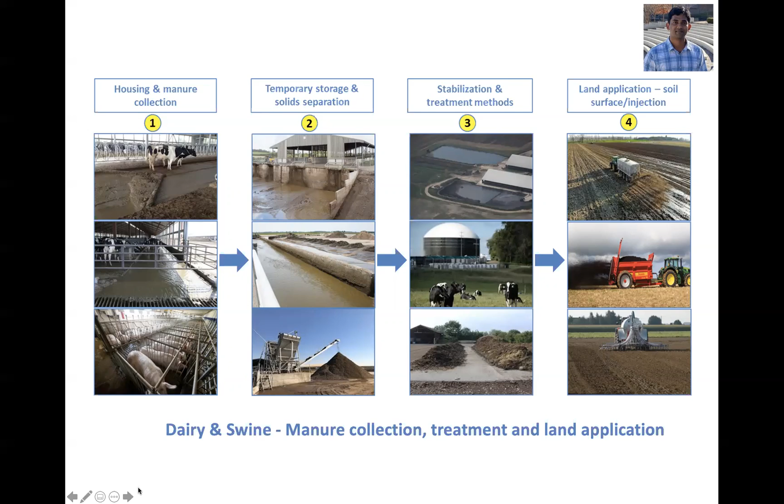So in our decision support tool, we will recommend manure management alternatives through decisions made based on three primary criteria, that is economics, environmental impact, and technology performance. Further, each of the criteria will have sub-criteria that are calculated or ranked with respect to many treatment alternatives that the user is allowed to select. For example, the different treatment technologies include lagoon-based systems, anaerobic digestion, solid liquid separation, membrane technologies, composting, etc.

Further, the sub-criteria for economics will include capital cost, operating cost, cost savings, and revenue generation for each of the treatment methods selected. Similarly, environmental impact will include global warming potential, acidification, eutrophication, and ecotoxicity. Finally, the technology performance will be ranked based on the survey question or scoring methods, which will be discussed in later slides.

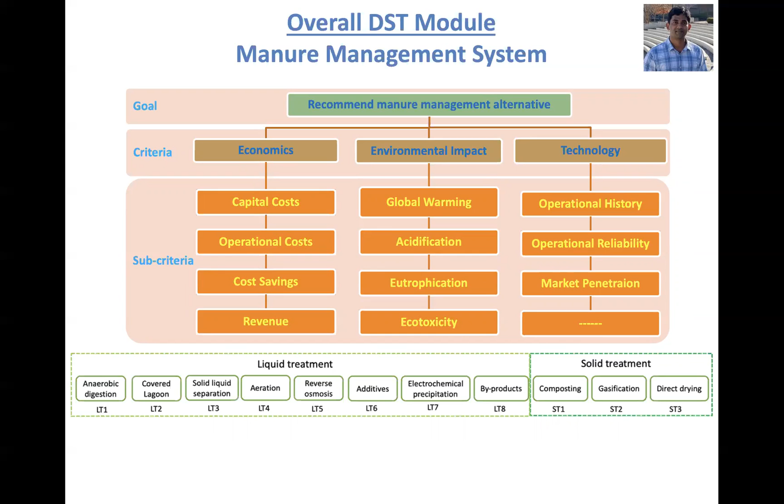The decision support tool has four major components. First is the user input sheet, where all the waste generation and treatment processes will be occurring. Next is the cost benefit analysis and life cycle assessment. Then the analytical hierarchy process for decision making, and the Python programming to read and perform calculations. The current prototype manure management tool is an Excel-based platform with empirical performance-based mass balances for several manure management alternatives representing current and emerging technologies and practices.

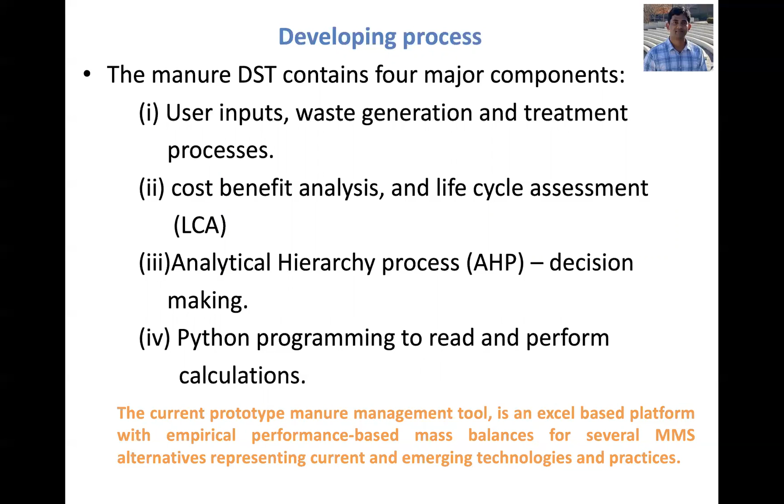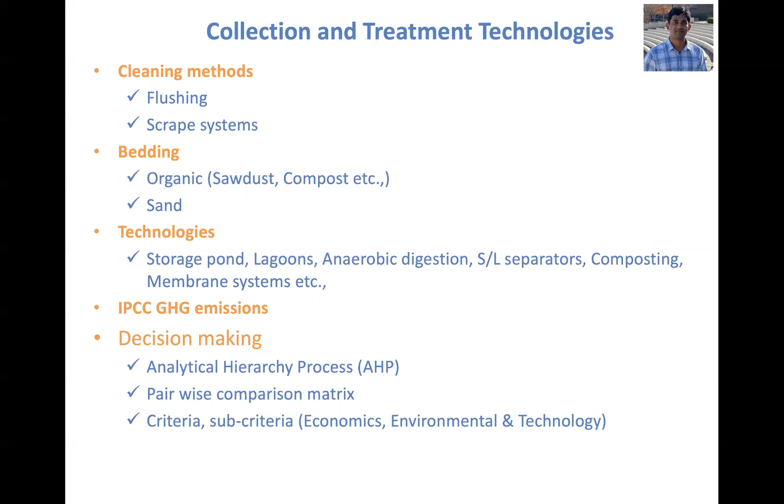The tool contains different subcomponents related to the collection and treatment methods, and the user will be provided with placeholders with a reference guide to choose the recommended values, or they can input their own farm values. These components include different cleaning methods such as flushing or scrape systems and the amount of water used for cleaning, and different bedding methods, organic bedding including sawdust, compost, or inorganic bedding such as sand, and the amount of bedding used per animal. And the different technologies include storage ponds, lagoons, anaerobic digestion, etc. And also we have IPCC greenhouse gas emissions, and finally the decision-making process.

To give an example, we have the process flow diagrams, which include different collection and treatment methods. And we have performed the pre-calculated mass and energy balance for each of these scenarios based on the number of animals and the manure generated. This is one of the scenarios where the user has a flushing system with sand bedding followed by a sand separation lane and treatment through an anaerobic lagoon system. We also included recycled flush water to clean the freestall barn and the recycled sand bedding to the cows, where all the components are included in our calculations.

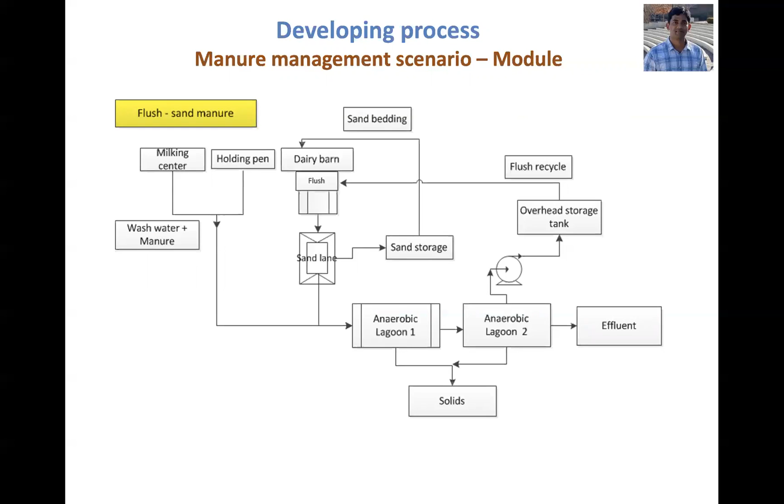So these are a few more examples for a simple storage pond with flush system, and other is the anaerobic digestion scenario, which treats the scrape manure with organic bedding followed by solid liquid separator.

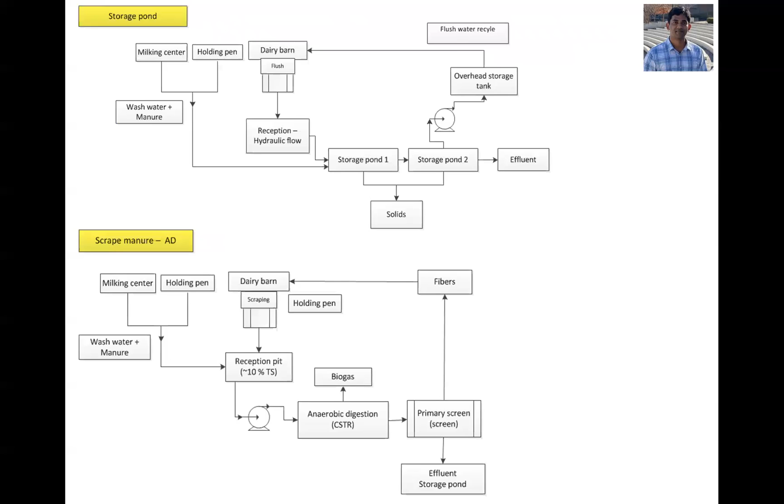Going forward, this is the user input sheet in which the purple cells have the recommended optimum values of minimum to maximum range, while the first three options are used for animal type and the weight selection by the user, and the adjacent red colored column cells are used for the user input. Similarly, we have the same option for different variables like bedding, flushing volume, manure characteristics from milk barn center, etc.

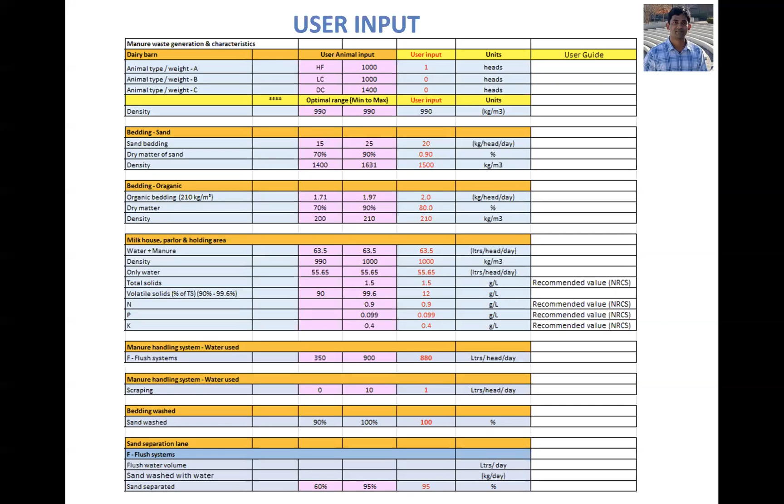Once a user creates an input file like this, they can run the program and tell it to read their file. Then the program reads those inputs and checks validity and starts performing calculations based on the scenarios that we have defined. This would also include cost analysis and LCA. Then finally, the results are output to an Excel file.

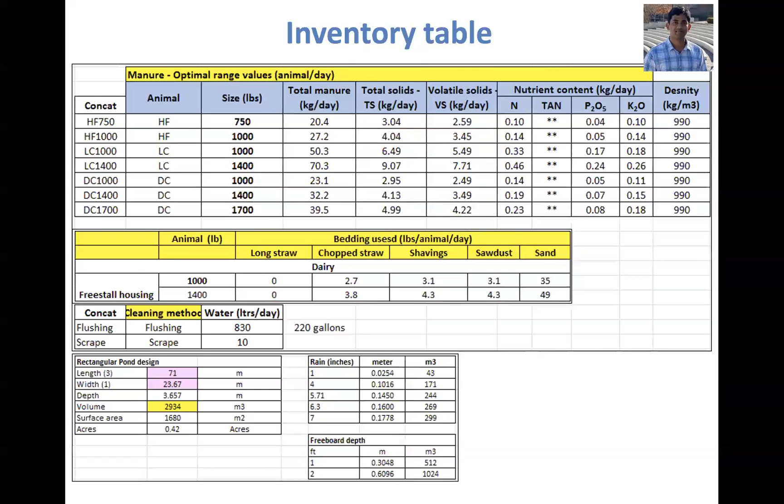This tool also provides a reference guide with the recommended values for different components of the manure management system where the user can look up values. And the treatment and mass balance calculations would include the following. For example, the total waste generated from the farm. We have the manure characteristics of all the manure generated like total solids, volatile solids, nitrogen, phosphorus, and potassium.

And the treatment calculations are performed considering the loading rate, treatment volume, treatment or separation efficiency representing different treatment methods. And we have the final effluent and solid properties. Also, it includes IPCC Tier 2 greenhouse gas emission equations for all the treatment scenarios to understand the environmental impact.

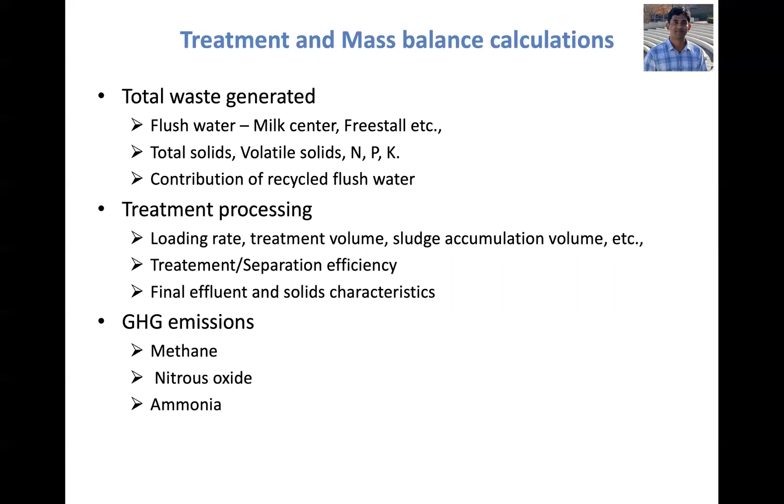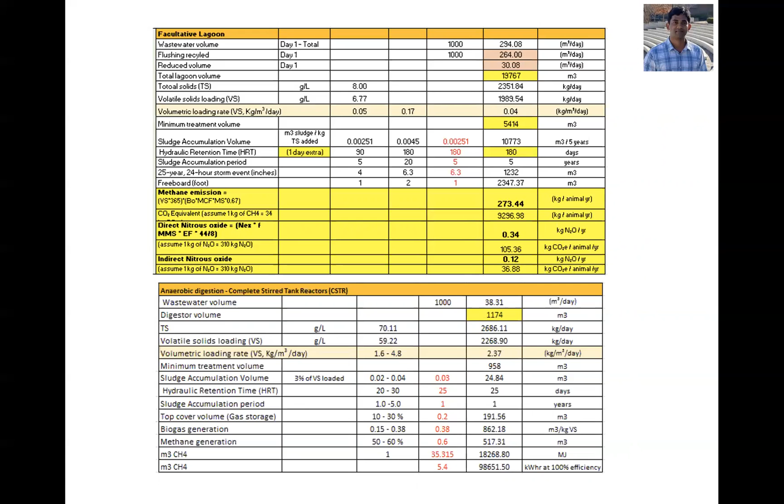This is an example for a lagoon system calculated for 180 days, which includes daily organic loading, sludge accumulation volume, storage volume for a 25-year, 24-hour storm event and freeboard, and the gas emissions. Similarly, below we can see the scenario for anaerobic digestion. We have all the engineering design factors.

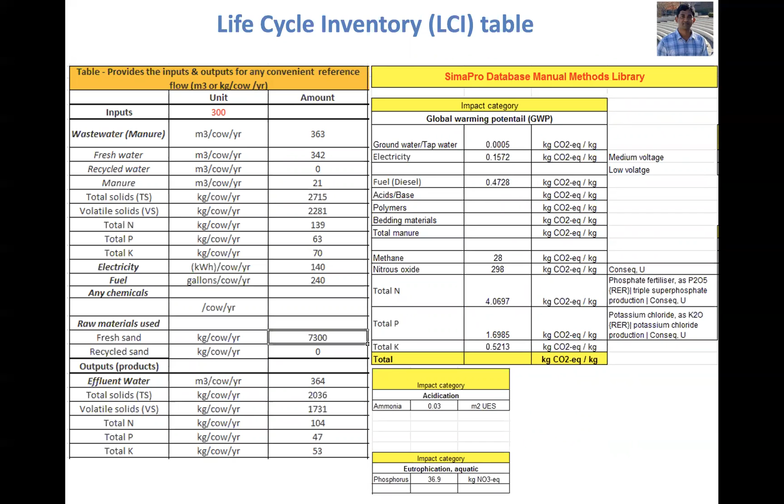And once we have the output from the earlier slide, that is the treatment technology file, we use those values to calculate the environmental impact using the reference values from the LCA software SimaPro. And finally, we use all the values from the technology file, environmental impact and economic values to consider the decision making. Please listen to the presentation from one of our team members, Erin Scott, where we have the cost and benefit calculations linked with this decision tool.

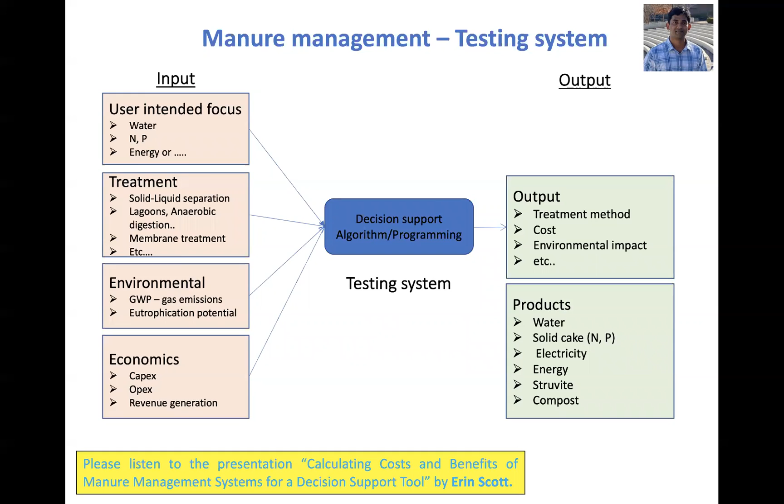For scoring the treatment technology performance, we'll be following the scoring method offered by Newtrient or by some survey questions in future. And finally, once we have all the output values, we use analytical hierarchy process to assign priorities on each alternative by identifying the goals or the importance of attributes hierarchically. This hierarchy structure is composed from low to high levels on the basis of criteria and sub-criteria, and gradually leads to the decision of best manure management alternative.

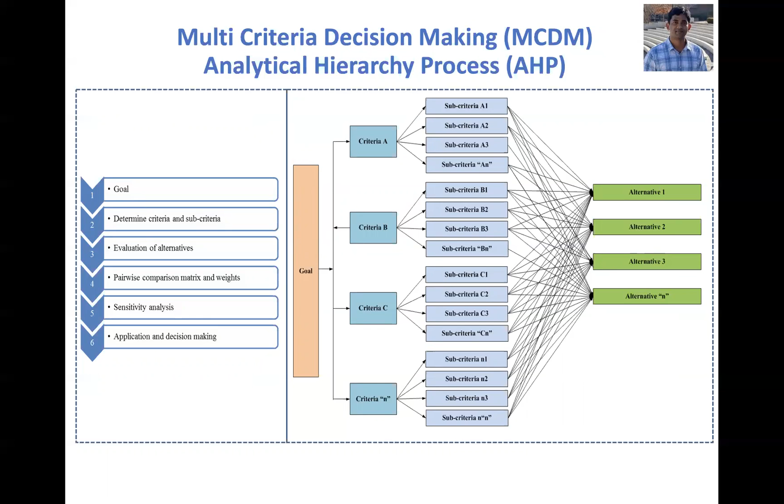Coming to the conclusions, for now, we have developed 20 different dairy manure management scenarios with all the mass and energy balance. These mass and energy balance values are nicely linking with the economic evaluation and LCA. Also, we have prototyped the analytical hierarchy process for testing the decision algorithm to select and rank alternative solutions under local constraints. Also, Python programming is being developed and we are test running the code. Next, we are in the process of developing the model for swine manure management.